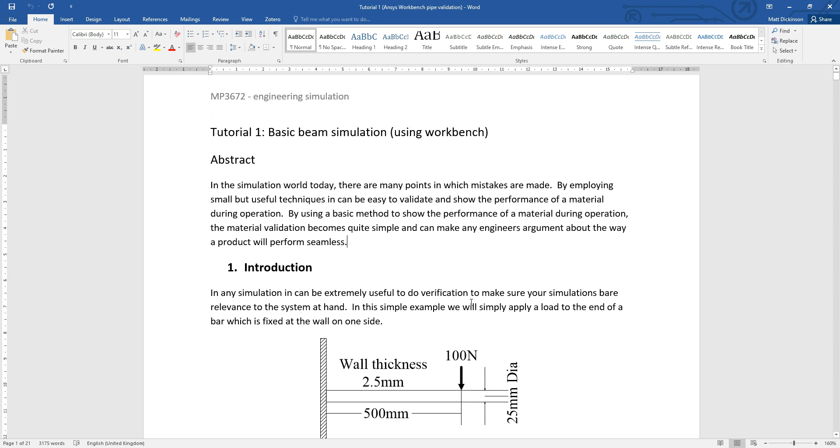Again, I've never done this, so I'm going to drag and drop static structural, set some of my basic principles. We know that the structural steel is what was initially used. So what I'm going to do is go geometry. I'm going to right click. Let's go DesignModeler geometry. Now, if you remember, everything in here is in millimeters, so let's set our units when we get in there.

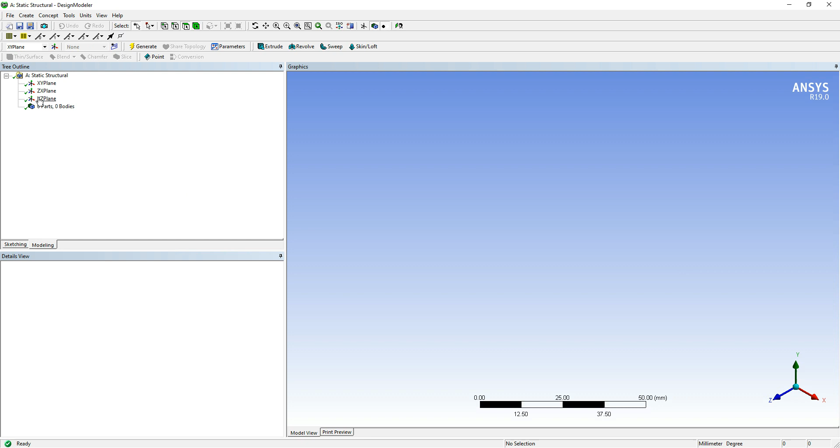so we're into our modeler. Now, we know we've got a 500mm length, but first things first, let's get our units set. I'm going to go to units next to tools, and I'm going to go millimeter. So now we know from looking down here, that's our scale, confirms we're in millimeters. Happy days. You see where Y and Z are. I'm going to model on the YZ plane. So it'll be over here.

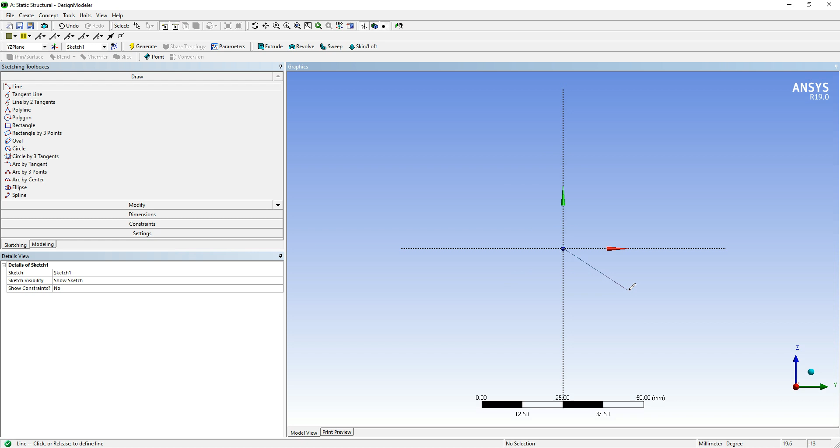So I've selected onto YZ and I'm going to go line. And I'm going to right click and then go look at. So now we're in position. Track it to the center. You'll know when you're in the center because it seems to snap into the middle. And I'm just going to draw a length. I don't know how well this is going to work, but it's going to be fascinating to find out because we've got our verification calculation that we're going to aim for.

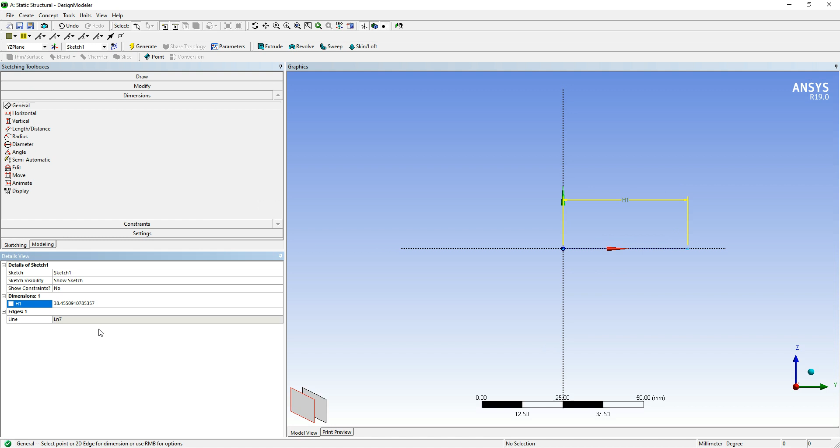So I'm going to go to dimensions. I'm going to general. And I'm going to left click once, left click again. Then we have a length of 500. So now we're into 500 millimeters. Fantastic. So I'm going to zoom to fit. My 500 millimeters length is in position. I'm going to generate. So now it's confirmed. Everything's in there, not a problem.

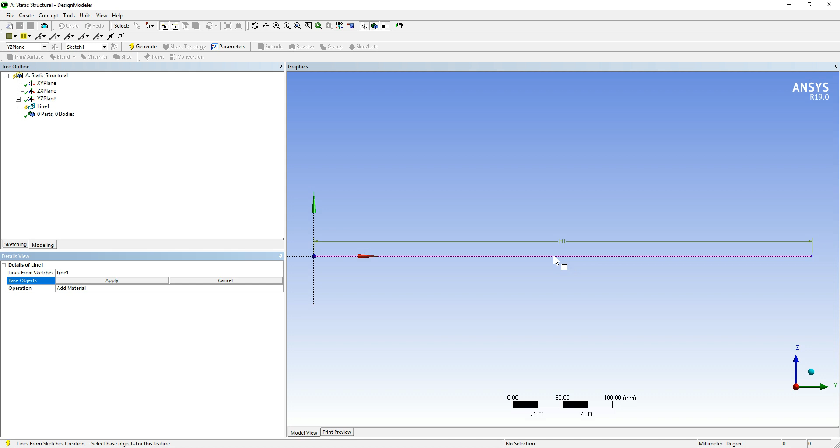So what I'm going to do is go to concept, then go to lines from sketches. I'm going to confirm this to be my line and then apply. And if you remember, if I spin this up, oh, generate. Sorry, I had to hit generate. But we see we've got the third plane indicator, which is nice because now we're going X, Y, and Z, and that's just to confirm that everything's good.

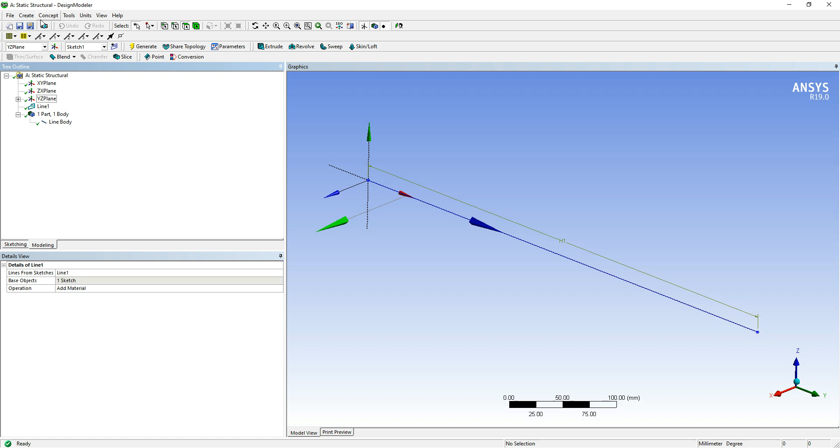So the only thing I've not done yet is I've not added my cross section, and we know it's a 25mm diameter with a 2.5mm wall thickness, so we know RI is going to be, sorry, 20/2, so 10, and RO will be 12.5. So let's go concept, cross section. We're going to go circular tube.

Our RI is 10. Happy days. And I'm told that you can actually put it in by equation, so I'm just going to have a go. 25 over 2. No, not true. So we're going to go 12.5. So we're 12.5. Right, brilliant.

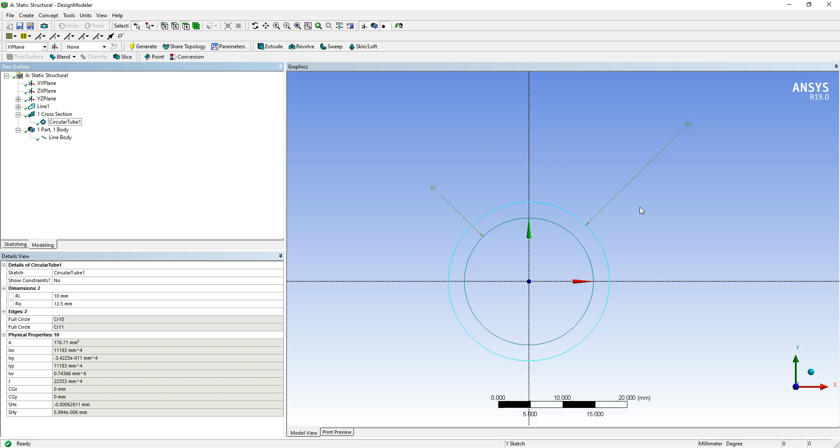So let's bring it back. If I just spin it back round a little bit again, it's 12.5 millimeters, and what we're going to do is attach it to this line. Right, so as you remember, I've got it in there, it's confirmed, it's happy, everything's yellow at the minute, but when I've expanded my bodies here, it's asking for line body. So where it says cross section, it's saying, okay, fine, you've done that, but what is your cross section? So I'm going to say, that is my cross section.

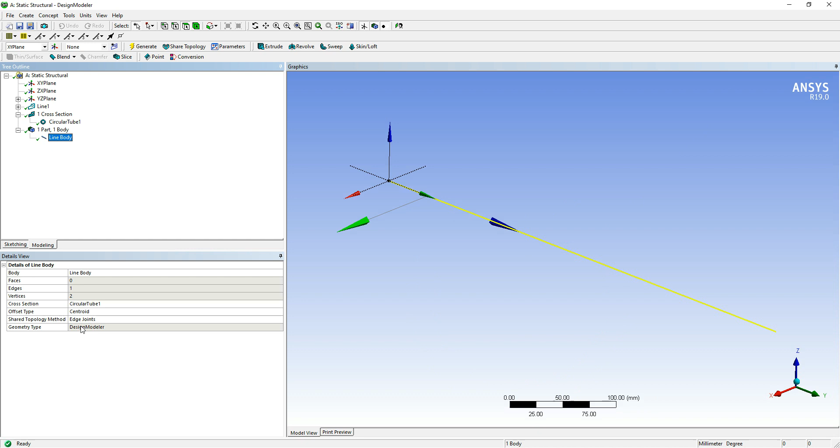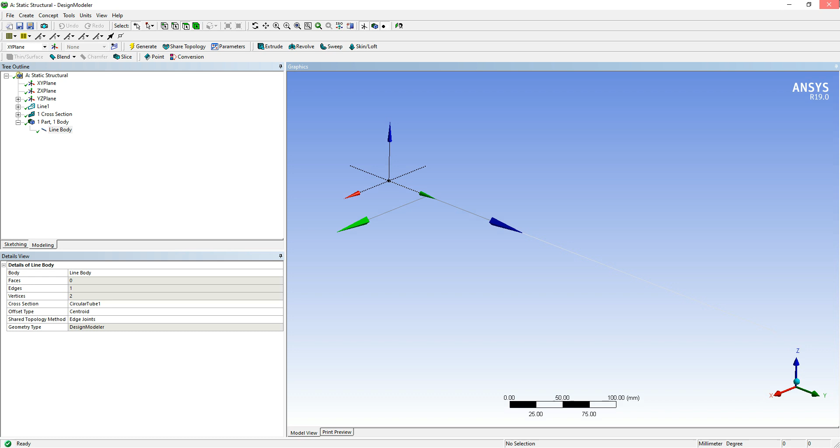So what I'm going to do is close that, and you can go into any of these because this is essentially where everything's sitting at the end. So I'm going to go sketch. It's because I've just been doing SolidWorks. I'm going to go setup, right click, edit. Brings in my solver, and it's now going to set up my peripherals for the simulation. So let's just bring in edit. Any second now. There we go.

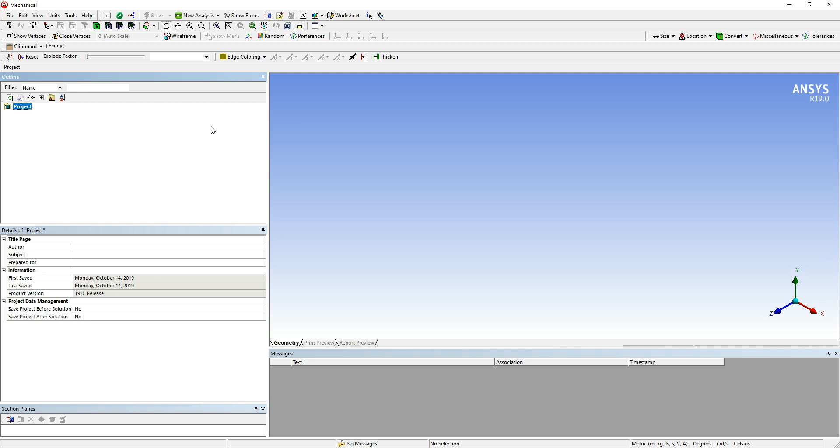It's the only one thing that irritates me, the amount of time it can bloody take to actually get anything made.

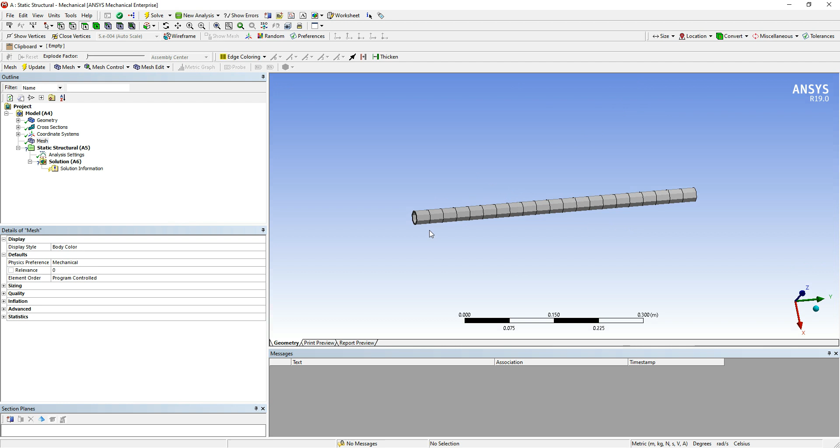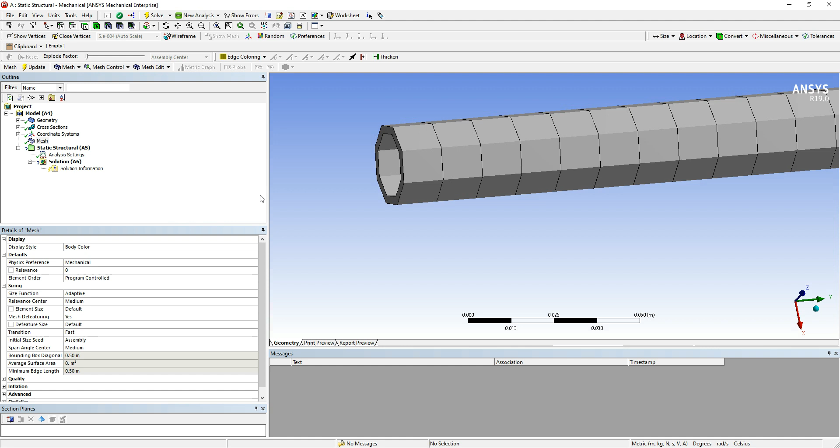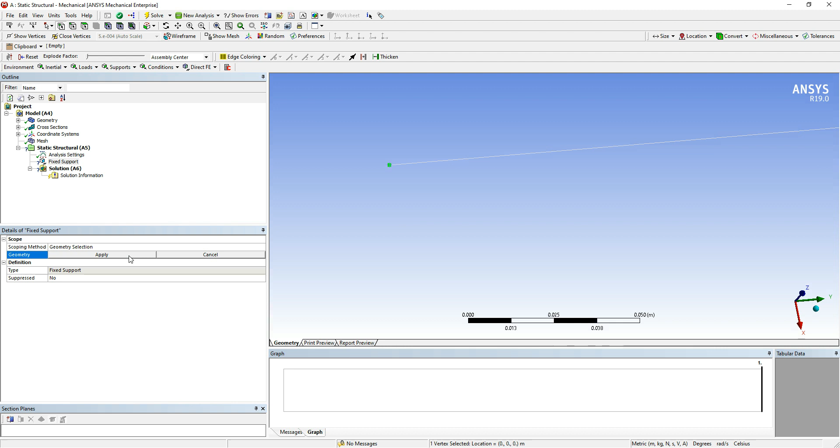So I'm going to go to static structural, and I'm going to go support. Be interesting to see how this comes out, because like I said, I've never combined the two notes. So I'm going to go fixed support. I'm going to go up here. Don't forget, up here we've got the different plane selection. I can't remember what they call this. Oh, vertex or node point. So I'm going to click apply. If I've clicked on the edge, now be sure not to click on the wrong way around.

This, bloody hell, this machine at the back of me, I don't know if you can hear this, it just keeps making bloody lots of noise.

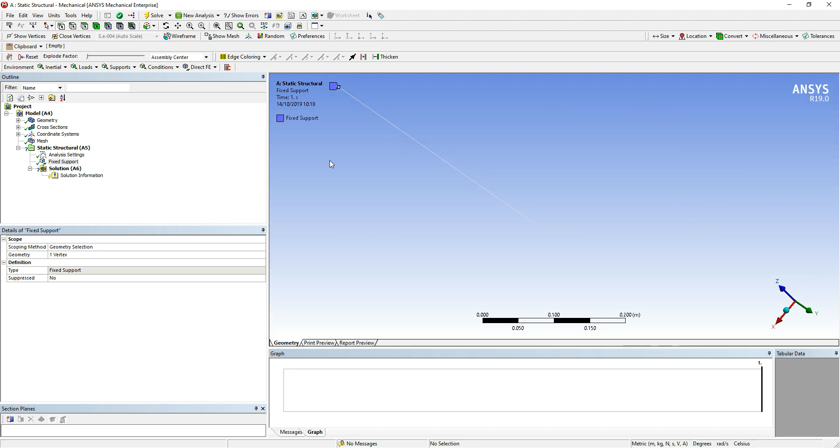Anyway, so this is my fixed point. Do not click on the same point. If it comes back, it will be blue, and then all I ever listened to in my past experience is, God, ANSYS is shit. It's not that at all.

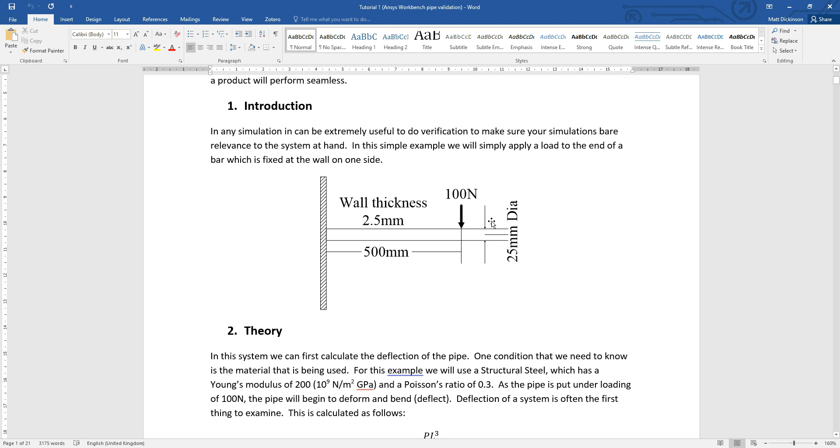So what I'm going to do is go loads, and I'm going to go force, because we know from the notes, let me just swing them across so I remind you, we know from the notes that it's 100 newtons. These are the values that we're aiming for, so let's see what we get. Again, I've never done it like this, so it'd be interesting. If it comes out more accurate, I'm going to be gutted, because it means that the linker method is far more superior to what I've been essentially doing.

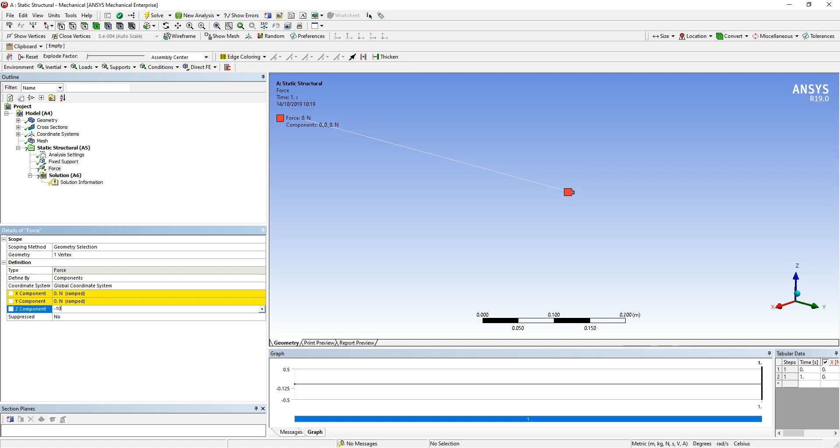I've selected the endpoint, clicked apply, it's gone red, confirming it's happy. I'm going to go down to component, and on Z, because I'm moving as opposed to the datum, I'm going to go minus 100 newtons, because that's my initial load, don't forget.

Because of where we've done this, you're going to be blown away how quick this solves. I've even turned up the mesh, just for shits and giggles, so it's super fine. It won't actually do much, but just for giggles.

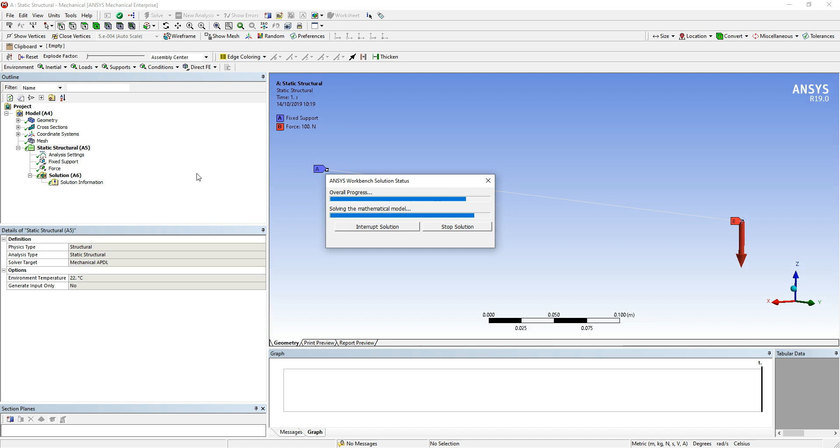Right, so I'm going to right click and select static structural and solve. Give it a minute. 3, 2, 1. There we go.

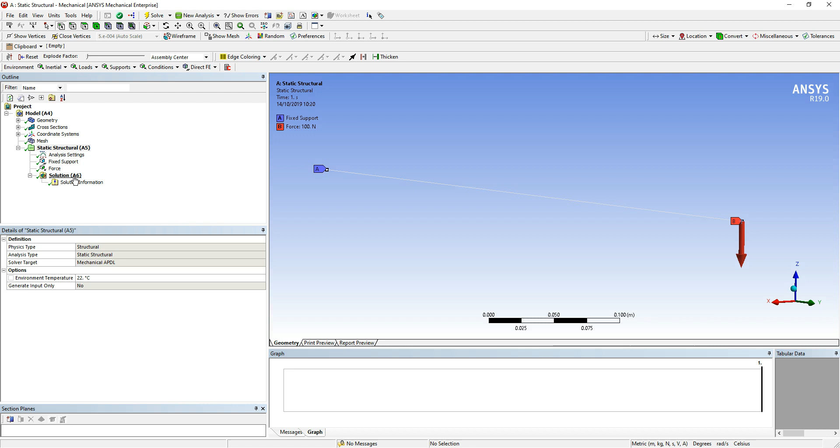Right, so we've now got it solved. It's now given us, in essence, I always do it this way because I like students to realise that if you forget to put a solution in there, don't worry, you don't have to solve it again. Don't get me wrong, this is taking seconds, but if you were doing a solve and it was taking days, you could come back without screaming from the hilltops about how annoyed you are. So you don't have to do that.

So my solution, I right click and go insert. And don't forget, with this we're going to look at beam results. I'm going to go beam tool. See how the lightning bolts are there? And I'm going to right click, evaluate.

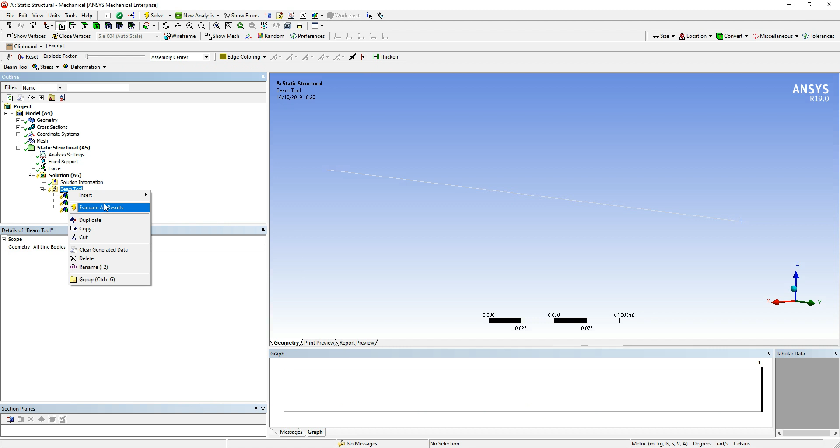It's direct stress. Yeah, that went well.

Let's go maximum combined stresses. Oh my god, look at my maximum combined stress. Look at the top one, we've got 5.5. Maximum stress 5.5. This is actually better.

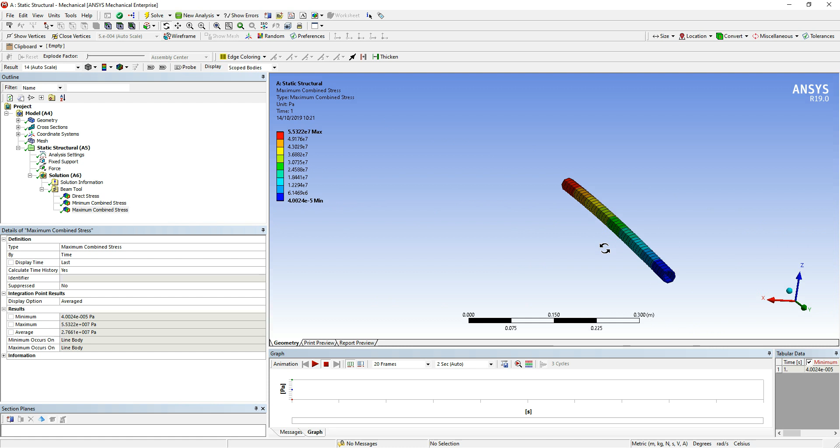Oh, that's not good. Anyway, the issue is, if I look back here, the way this has been solved, all it can actually do is identify points and where the maximum stress is. It cannot give me an overall figure. So the meshing procedure I'm using, as much as it's given me that verification value nicely, if that was the end of what I was doing, then this would be fine.

But if this wasn't the end, and I was making a tube for, let's say, a mountain bike, like the Marin example, I'd need to know the maximum points of concentration so I could improve the design to make it better. So this gives me a nice result, but it's not the best.

So let's see if we can pull some, let's have a look, beam tool, deformation, total deformation. What's this going to give me? I think this is going to be out.

Oh my god. Right, so we are on 185 and 164. Come back here. Look at that, without any refinement, without any messing about, it's actually giving me a better result. Damn, damn, damn, damn, damn.

So again, if this is my end target, if this is all I'm looking to do, if I'm just looking to verify this material, I suppose this would be just as good. A verification for a material model is actually, dare I say it, better than my notes. Damn it, who'd have thought?

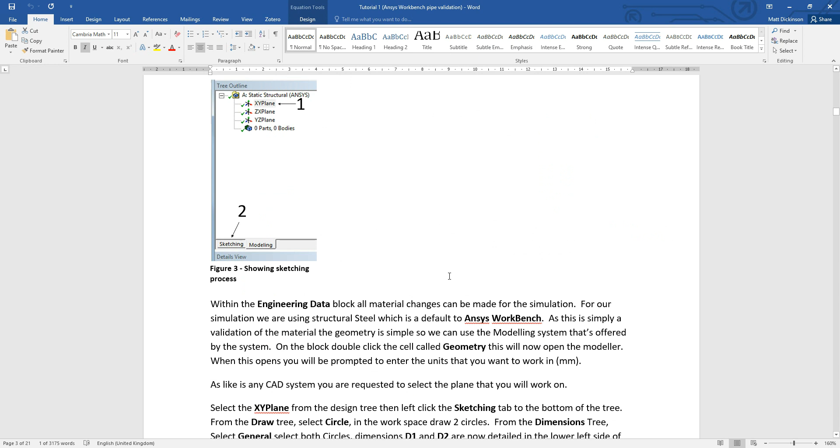Anyway, so that is an amalgamation of the notes from this verification model. So if I come down, you remember this. Let me come down, come down, come down. It's a verification from...

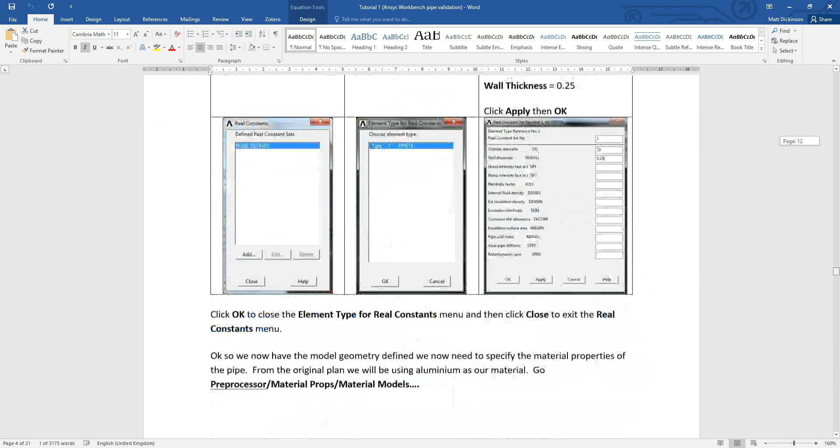Wow, I even did a verification on APDL. Didn't realise that was there. Ha! So it's a verification model on this, and yeah, it's done a pretty good job. I'm actually quite impressed.

But that's just a review really of what we were doing and why we were doing it. I thought I'd combine the two because you've got the notes to support the different truss and the pipe verification, but I thought if I combine the two as an example, it's a little bit extra, because this just shows you a way of simplifying the process dead quick when all I had to do was simply draw a line.